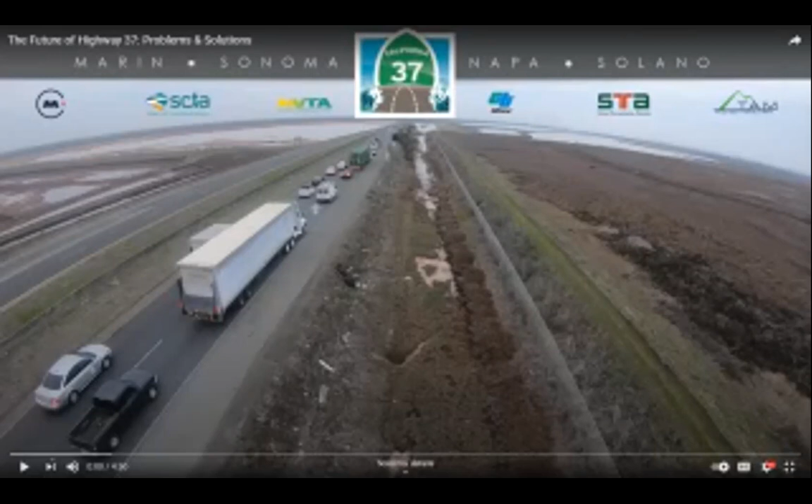Highway 37 is a critical piece of the Bay Area mobility puzzle. The 21-mile corridor connects Solano County cities and some of the most affordable housing in the Bay Area with jobs in Napa, Marin, and Sonoma counties. Yet the route is challenged by issues of congestion, flooding, and sea level rise, as well as limited access for bikes or pedestrians. Even with the pandemic, traffic flow on Highway 37 is routinely pinched by a 10-mile bottleneck. This stretch, in particular from Sears Point to Mare Island, has one lane in each direction separated by a concrete barrier, meaning westbound traffic backs up in the morning, adding up to 30 minutes to the typical commute and impacting Vallejo streets as drivers divert through Mare Island.

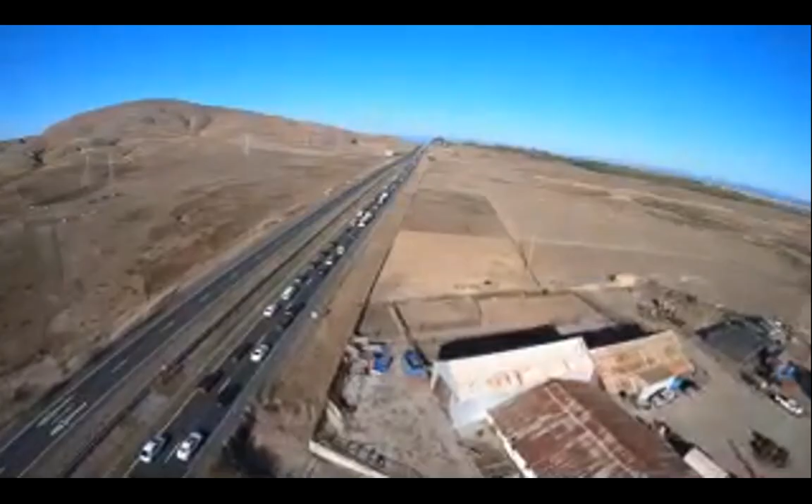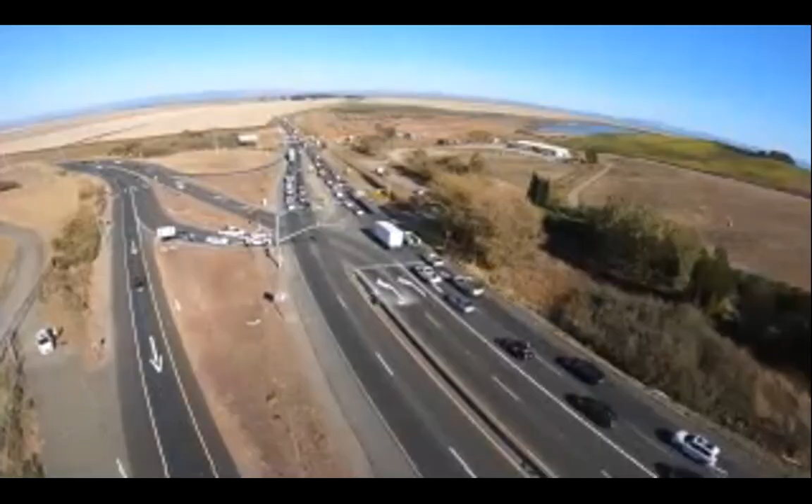In the evening, eastbound traffic backs up from Sears Point to beyond Lakeville Highway, adding as much as an hour and 20 minutes to commute times for some drivers, and extra safety problems for drivers who have diverted onto Lakeville Highway. There is no easy alternative to Highway 37.

As you can see in these two existing options, drivers forced to detour north or south would have to travel twice as far to get from Vallejo to Novato or vice versa.

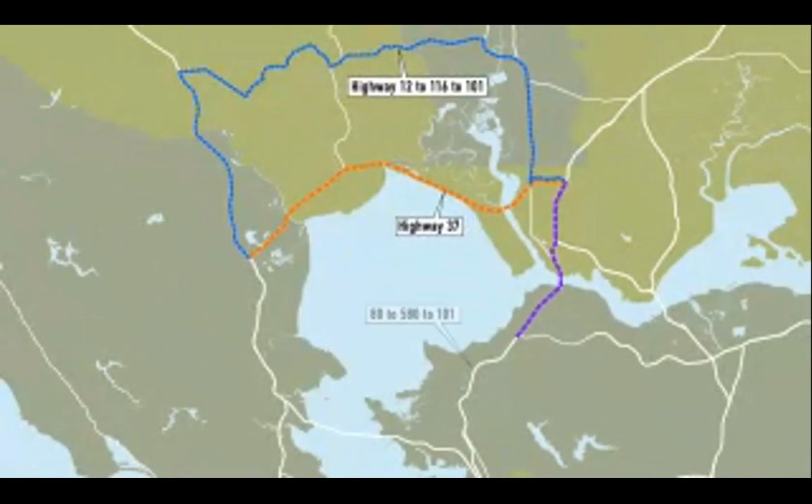A commitment to equity requires a reliable link between the comparatively affordable housing in Solano County and job markets to the west. Highway 37 can be a viable route for future transit service only if buses can avoid congestion.

The situation can be even worse in the winter. Existing levees protect the low-lying highway from everyday flooding, but heavy rains and king tides can shut down the entire highway, as happened for 28 days in 2017 and for 8 days in 2019 due to flooding at the Novato Creek crossing. Rising sea levels will require a permanent long-term solution.

That's why Caltrans, the Metropolitan Transportation Commission, and the transportation authorities in Marin, Sonoma, Napa, and Solano counties have formed a single team to work with you to develop workable ideas and design a modern, resilient Highway 37 that's higher, safer, greener, and built to last.

All options are being considered, including the existing alignment, a new bridge across San Pablo Bay, or an inland retreat.

Is reducing congestion a priority? In addition to providing transportation for cars and trucks, how should Highway 37 accommodate bikes, pedestrians, buses, and maybe even trains? What about conserving wetlands and wildlife, or greater public access to broaden opportunities for all to enjoy the natural resources that flank the highway?

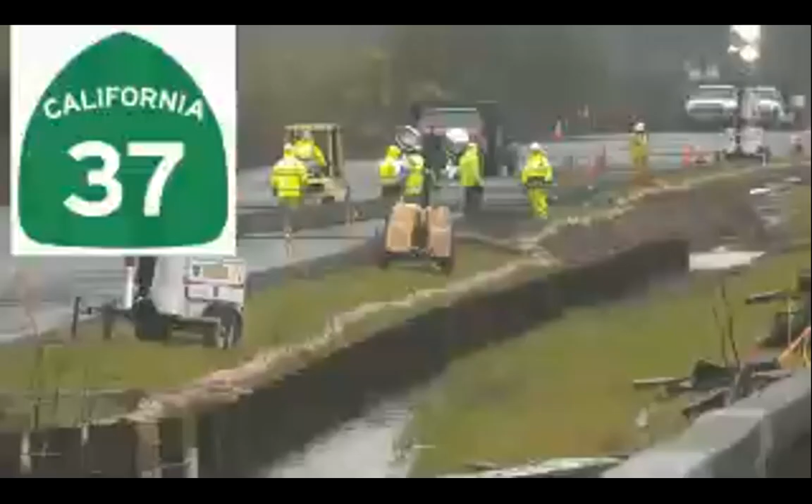On the Marin County end of the corridor, crews already have raised the pavement elevation, built concrete flood walls along critical segments of Novato Creek, installed new drainage systems, culverts, and slide gates, and acquired inflatable rubber bladders and portable pumps for deployment before major storms.

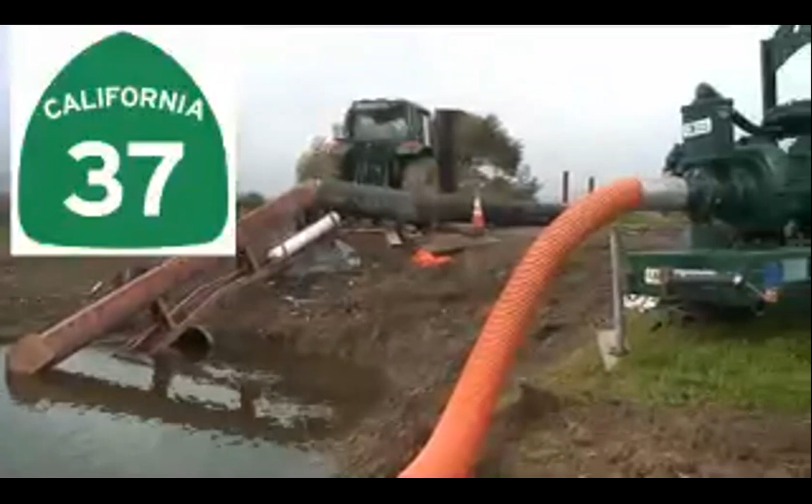Work set to begin soon includes more paving and repair work, mowing and weed abatement.

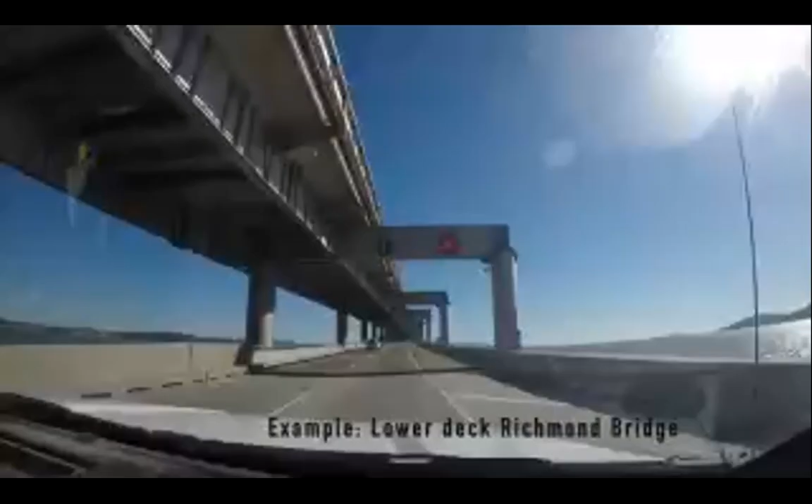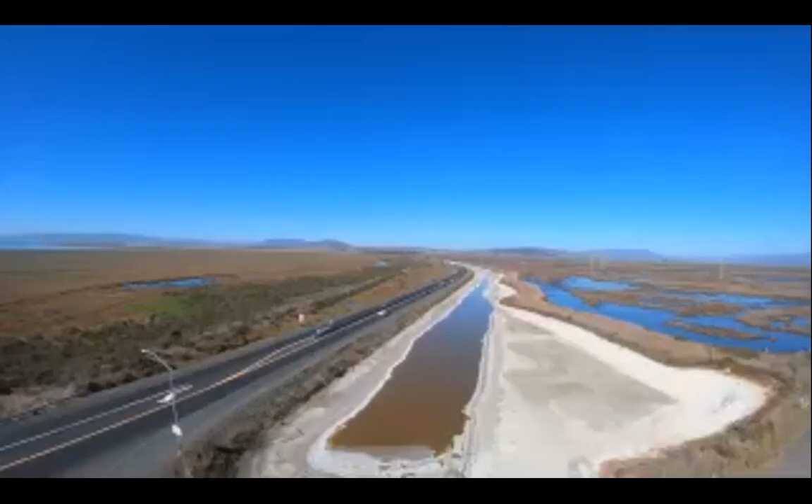Challenges include avoiding impacts on sensitive wetlands and minimizing the use of any bay fill. The other big issue, of course, is money. For both the interim congestion relief alternatives and a long-term project to completely transform Highway 37, tolls may be a practical solution that can serve as a match to secure other regional, state, and federal dollars.

What do you think are the right solutions for the Highway 37 puzzle? We look forward to hearing from you as we discuss the past, the present, and especially the future of Highway 37. One corridor, one team, many solutions. We're glad you are part of the team, and we welcome your ideas for solutions along Highway 37 and in the San Pablo Baylands.

Good evening. My name is Stefan Galvez Abadia. I'm the District Division Chief for the Environmental Division in Caltrans District 4.

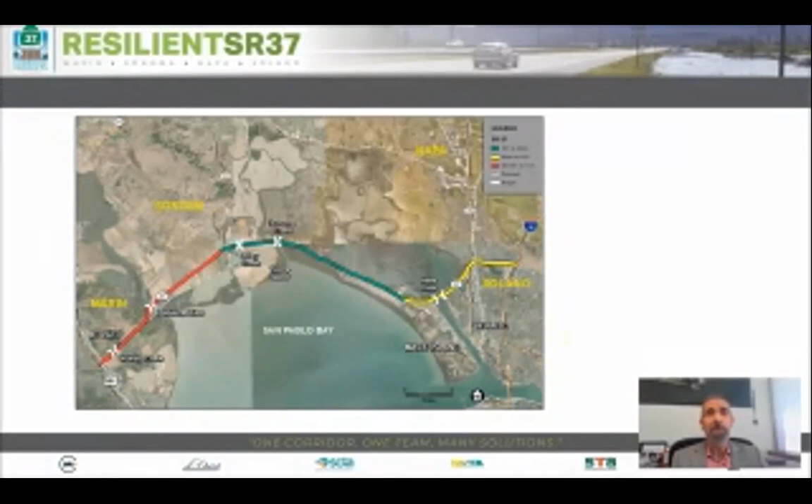As you saw in the video, State Route 37 is a 21-mile long interregional route located along the northern shore of San Pablo Bay with ecologically rich baylands, biological and cultural resources, and is also considered part of the Pacific Flyway for migratory birds. State Route 37 provides a direct link for commuters, freight, and recreational traffic between US 101 to the west and I-80 to the east.

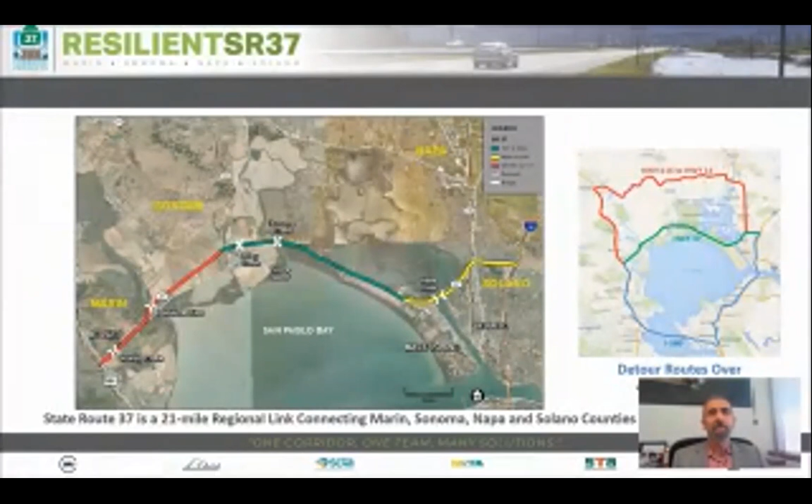Without this key transportation link in place, traffic detours are over 40 miles long. So we think of Route 37 as having three distinct portions.

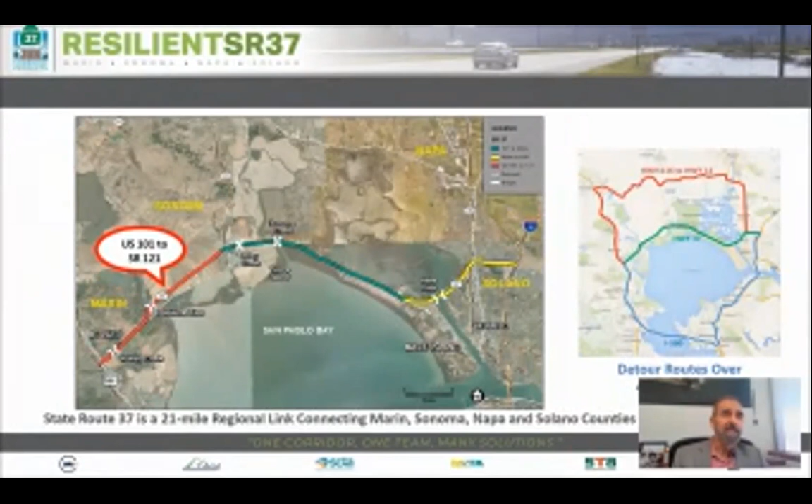So to address these long-term challenges, Caltrans, MTC, and the 4 North Bay counties are collaborating to develop a site-specific and corridor-wide solution. We need your input for these studies.

In addition, a previous design alternatives assessment study looked into options of how to balance congestion and sensitive environment in the middle portion of the corridor, which is shown.

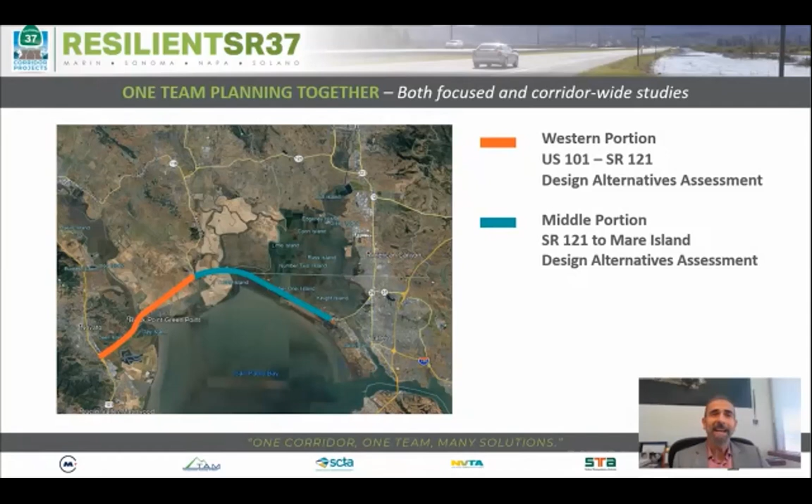Each of these studies and planning processes will benefit from obtaining public input. While this is not the only time we will seek your input, this stage is important because it's going to help us shape the PEL study's draft project purpose and need and the range of solutions. And now I'd like to turn it over to Tammy Massengale, who will tell us more about the PEL study and your involvement in the PEL process.

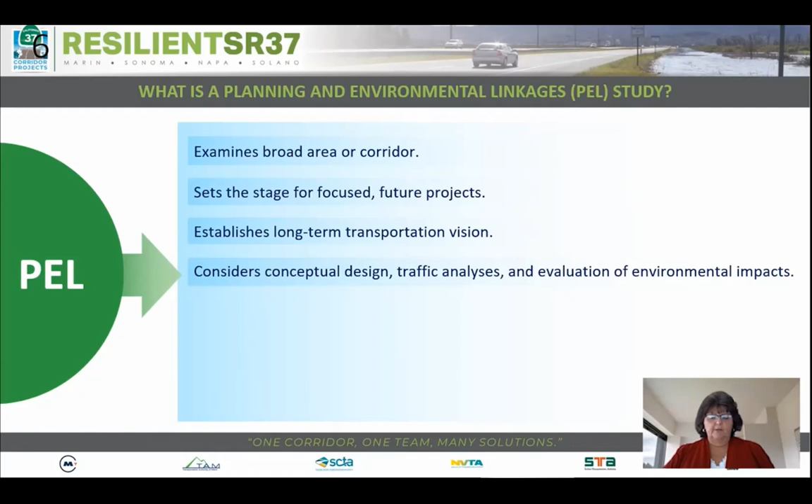The PEL process is a voluntary, flexible, and collaborative planning process. It examines broad transportation, environmental, community, and economic goals early in the planning process. PEL studies allow agencies to look at the big picture by examining a broad area or corridor. PELs establish long-term transportation visions and set the stage for focused future projects. They compile preliminary data and consider a conceptual level of design, traffic analysis, and an evaluation of environmental impacts. PEL also solicits input and, if possible, support from the public, tribes, elected officials, resource agencies, and other stakeholders regarding agency transportation decisions. It establishes buy-in from agencies and stakeholders on corridor vision, purpose and need, alternatives, and consideration of key environmental issues. The process encourages working relationships and early agency involvement, which enables more effective decision-making.

Now, let's look at some of the benefits of a PEL. Some of the key benefits are realized from examining environmental and community values early in transportation project planning. This includes involving agencies and others to find both concerns as well as opportunities for collaboration. It also allows more participation in helping shape transportation solutions.

One of the direct outcomes of a PEL study is that the enhanced and early coordination with resource agencies and the public yields better transportation programs and projects that serve communities' transportation needs more effectively. The PEL supporting studies provide agencies with tools to design better projects while avoiding and minimizing impacts on communities and natural resources. Improved interagency relationships will also help to resolve differences on key issues, moving from planning through design and ultimately project implementation. Another benefit of a PEL study is improved project delivery timeframes by minimizing potential duplication in environmental compliance processes, thus creating one cohesive flow of information.

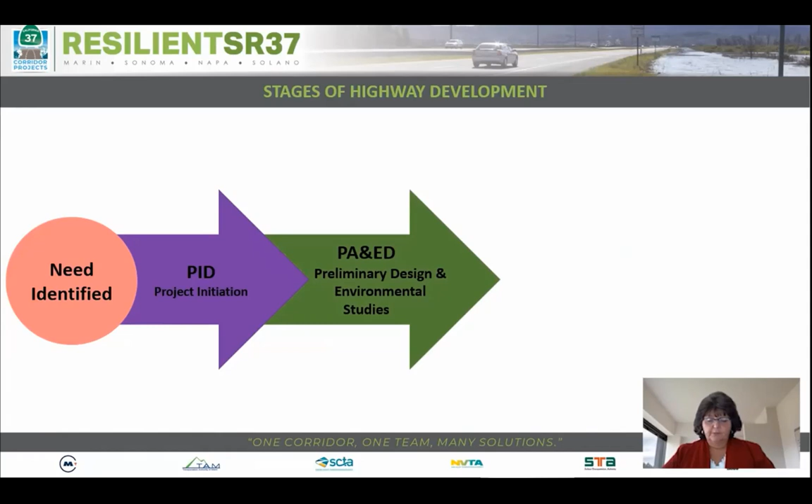Project Approval and Environmental Document, also known as PA&ED, is when the purpose, need, and alternatives are refined. Design is completing preliminary design, and the environmental practitioners are completing technical studies. The final products include the environmental approval and the project report.

At the end of PA&ED, two phases begin. Right-of-way, where agents are working with property owners to obtain rights of entry and purchase of right-of-way, and then at the end of the phase, the surveyors complete monumentation for the project. The other phase is Plans, Specifications, and Estimates, also known as PS&E. During PS&E, the designers are finalizing the design, writing the specifications, and completing the construction costs for the project. Concurrently, the environmental staff is working with resource agencies to obtain permits and, if necessary, complete mitigation.

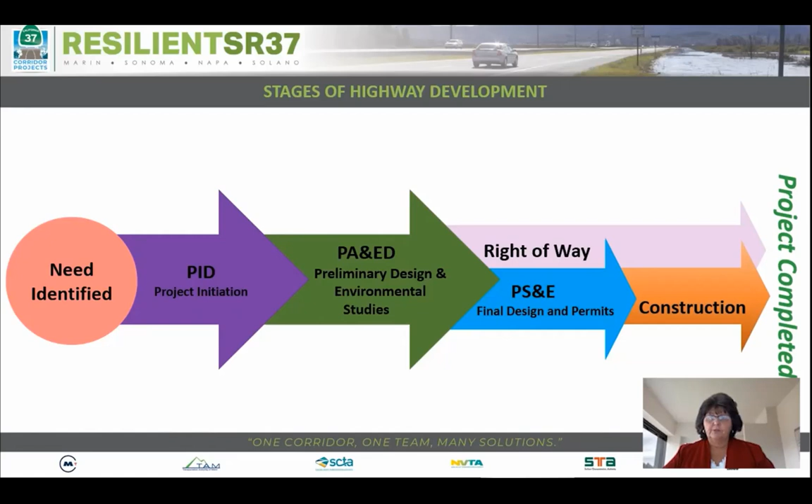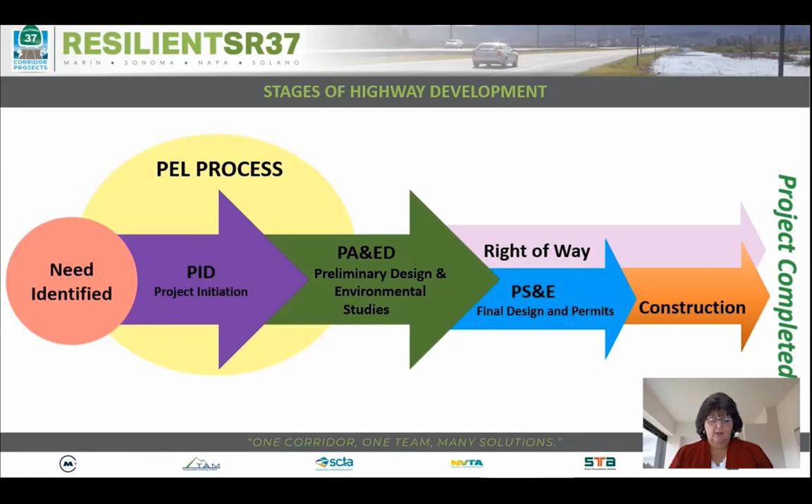The last phase is construction. This is when the project is built and opened to the traveling public. The planning and environmental linkages process takes a lot of work that is typically segmented and brings it together. The detailed purpose and need is developed and a thorough alternatives analysis is completed. These products are moved into the environmental process, saving time to complete the PA&ED phase.

Another challenge is how to integrate transportation planning with the needs and priorities of municipalities and agencies. This integrated planning graphic represents the best practice concept of transportation planning as a layering of the many local components that affect the transportation system.

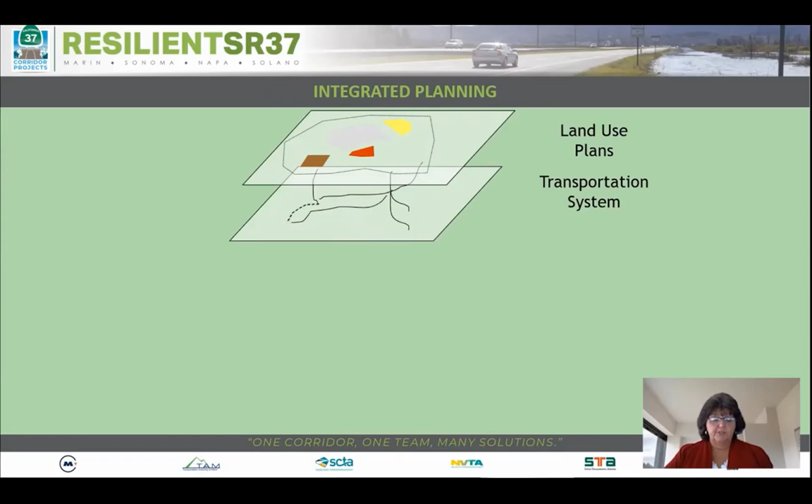While resource data can be integrated at any stage of the transportation process, early integration is best since it's much more difficult to embrace resource agency goals and priorities at later stages. Early coordination helps provide better protection of natural and cultural resources, and maximizes efficient use of scarce staff and financial resources by flagging potential problems before the narrowing of alternatives and completion of detailed design work. Failure to identify inconsistent or incompatible goals among transportation and resource agencies early typically poses a major source of conflict in program and project development.

Throughout the PEL process, we will be using information from previous studies. In the next module, Dick will walk you through how you can access some of this information and provide us with feedback.

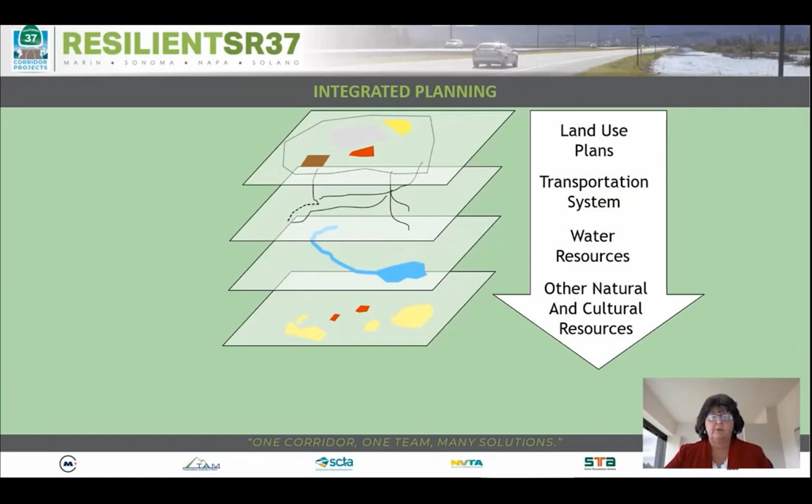In October of 2020, Caltrans District 4 initiated the State Route 37 Ultimate Corridor Planning and Environmental Linkages, or PEL, study from US 101 to I-80, to identify transportation needs, consider alternatives, and develop a comprehensive and collaborative transportation vision for this critical corridor. Since this is the first PEL on the state highway system in California, we spent a couple of months educating our resource agency partners and stakeholders on the PEL process.

As you can see, the last few months have led us to our meeting today. We have conducted meetings with our resource agency partners and stakeholder working group. In those meetings, we identified needs, looked for data gaps, and drafted a purpose statement that we will be discussing in Module 3.

The PEL will look to finalize its purpose and needs statement following our meeting tonight. The PEL will then start working on the alternatives analysis. We are planning a public meeting late this calendar year to discuss this, and we anticipate completing the PEL in the summer of 2022.

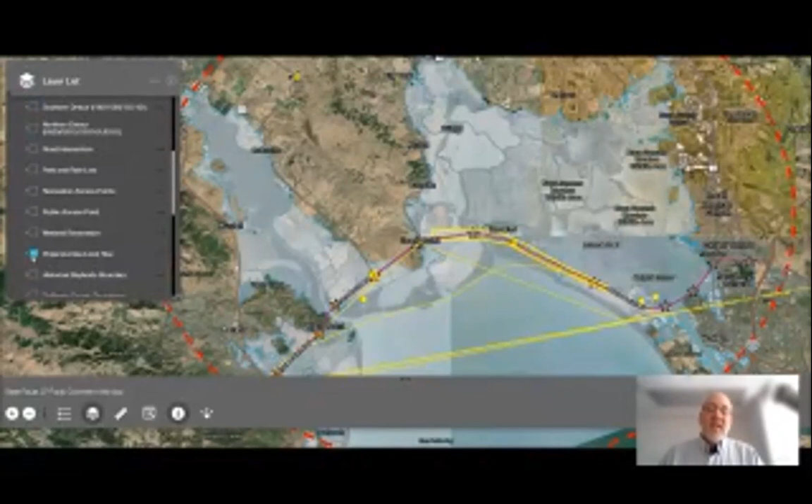Within this web app, you can explore available data for the study area. There's data on sea level rise, land use, bicycle and pedestrian trails, access points, wetland restoration areas, and much more.

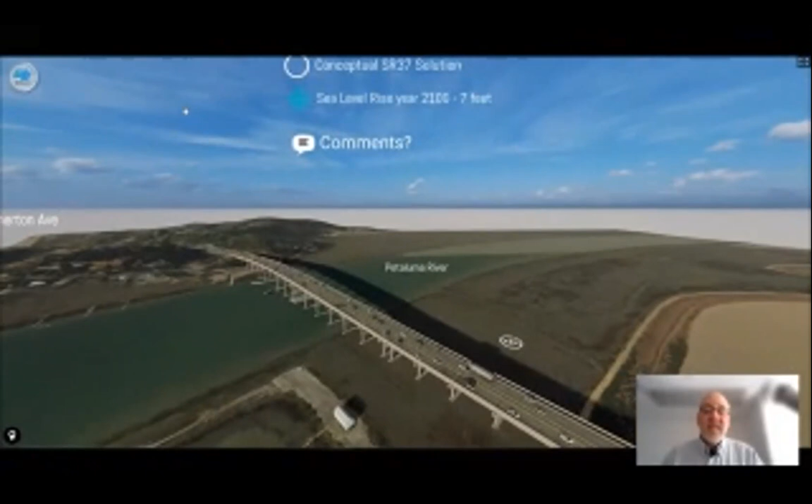There are even links where you can view and interact with 3D renderings. These renderings have been created to assist in visualizing alternatives that have been previously discussed for State Route 37 in past corridor planning and design alternative assessment studies.

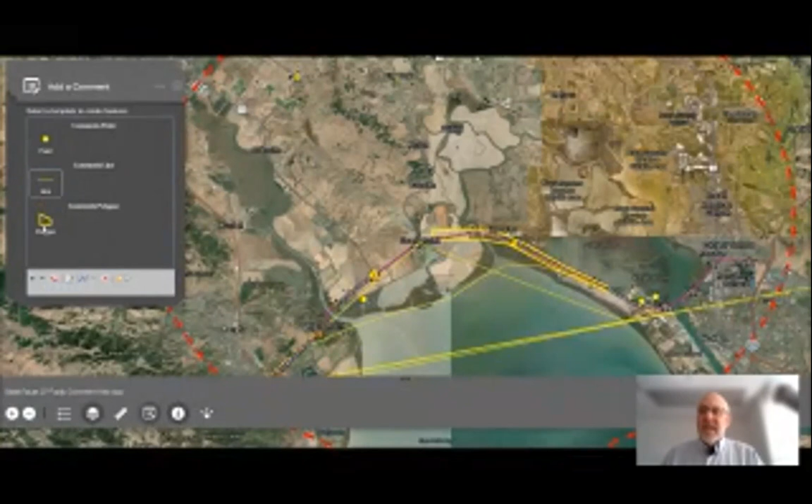Once you familiarize yourself with the platform and explore the data, you can also provide comments directly within the map using the Add a Comment tool that is embedded within this resource. Comments can be added for a point of interest, a line drawing, or an area drawing. We look forward to your engagement in this process.

Climate change and the threats from sea level rise will critically impact the study corridor and surrounding ecosystems. The State Route 37 corridor currently experiences issues with flooding during winter rains and high tide events, and with the ever-increasing threat of sea level rise, the corridor will experience increasing flooding due to the roadway's low-lying elevation and proximity to San Pablo Bay.

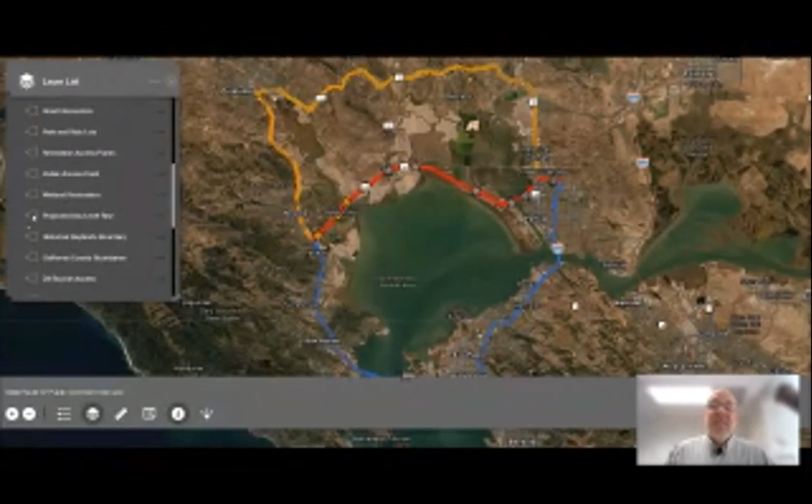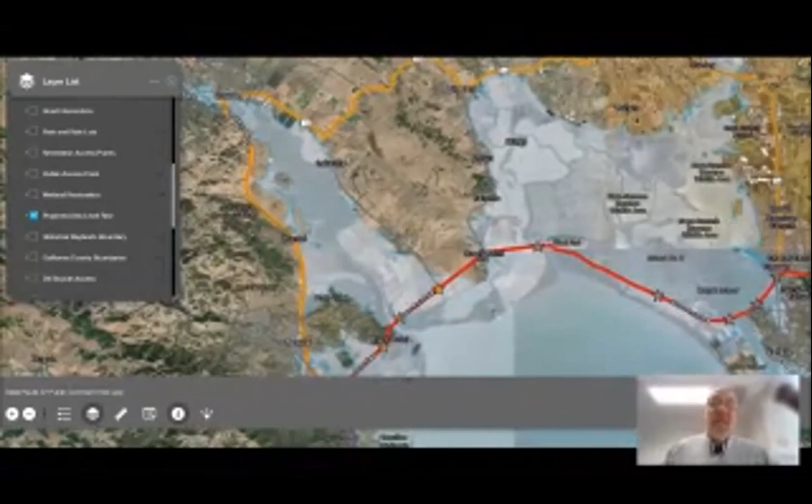The most immediate impact of sea level rise is increased flooding, so that lands that did not previously experience tidal inundation would be newly flooded. In addition, changes in wave height and run-up and increased erosion from wave action at the new shoreline edges will impact shoreline areas as sea levels rise.

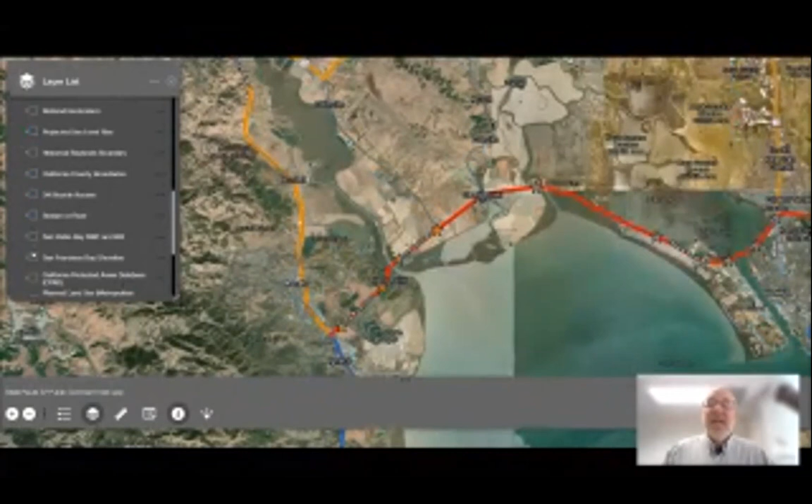Currently, State Route 37 relies on a complex, interconnected system of levees along major creeks and rivers for flood protection. Many of these levees are privately owned and were not constructed specifically for protecting State Route 37 from flooding.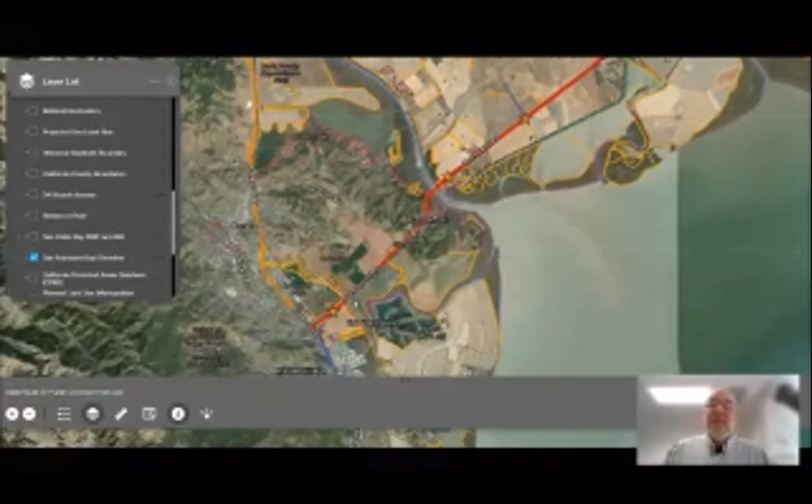Without modifications, current sea level rise projections show that areas of State Route 37 would be permanently inundated with only 36 inches of sea level rise, and could be exposed to storm surge flooding by a 25-year coastal storm event today, or a 5 to 10-year coastal storm event with only 6 to 12 inches of sea level rise.

Here you can see the current elevations of the roadway and rail facilities within the corridor compared to the high-end estimate of 7 feet of sea level rise by the end of the century. The existing infrastructure would not be sustainable in its current configuration if these predicted sea level rise scenarios come to pass. Without taking action now to make bold and forward-leaning planning decisions for these conditions, those that rely on this corridor will be the most impacted.

Good evening, everyone. I'm Lindsay Vivian, and I'm the Office Chief for the Office of Environmental Analysis in Caltrans District 4. We are an office of 30 that conducts environmental review on transportation projects on the state highway system in the 9-county Bay Area. In addition to that, at Caltrans, I'm focused on working with others, including other divisions, to improve the integration of environmental considerations into our project planning and system planning processes. These factors include wildlife connectivity, fish passage, and sea level rise adaptation.

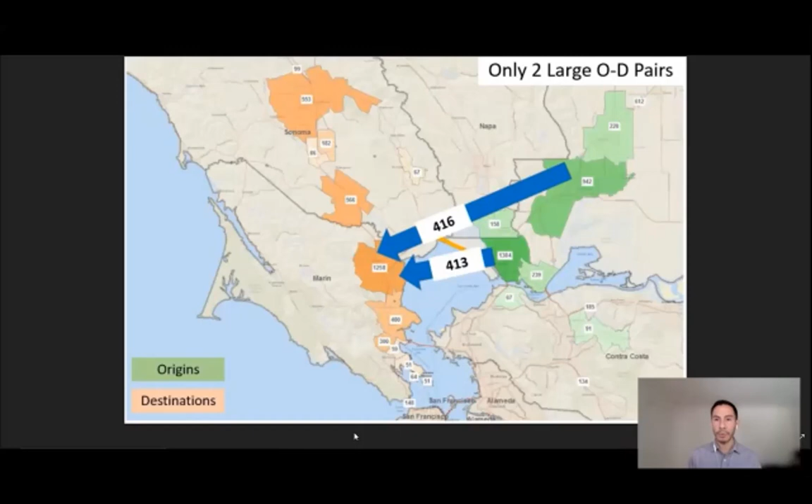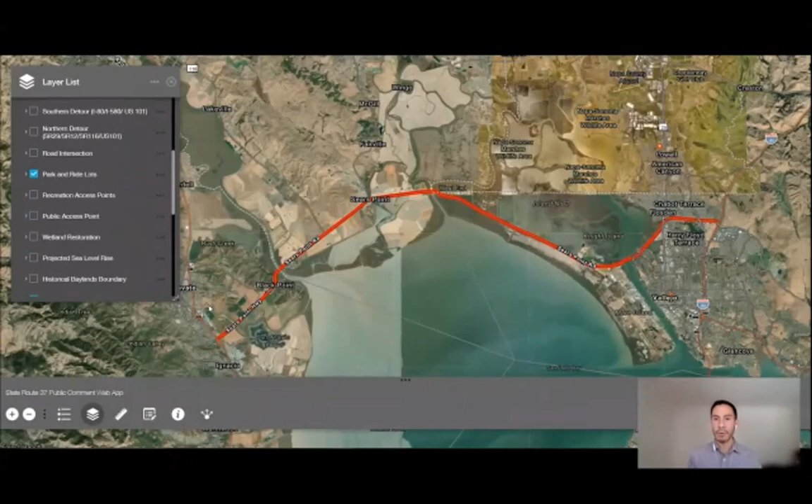Identifying suitable multimodal opportunities and how best to implement them along this corridor is an important consideration during this PEL study. Park and ride opportunities exist along each end of the State Route 37 corridor that could bolster existing carpooling and/or van pooling options. Improvements can include providing additional parking spaces, as well as drop-off locations.

SMART stops may also expand in the future, and the PEL study will consider how the long-term vision for the State Route 37 corridor can integrate carpool and vanpool options with microtransit, express bus connections, or even future passenger rail opportunities if they become viable.

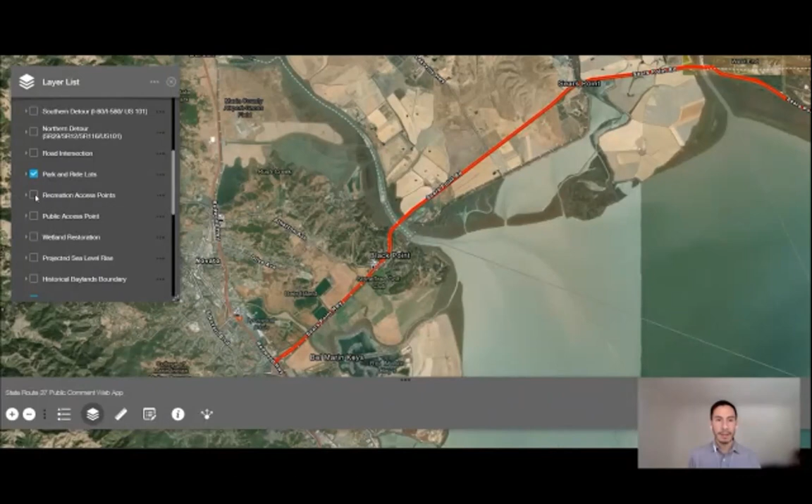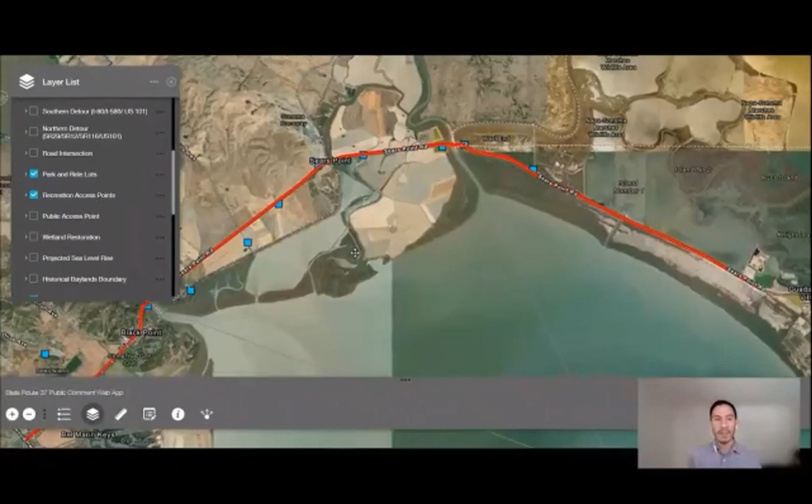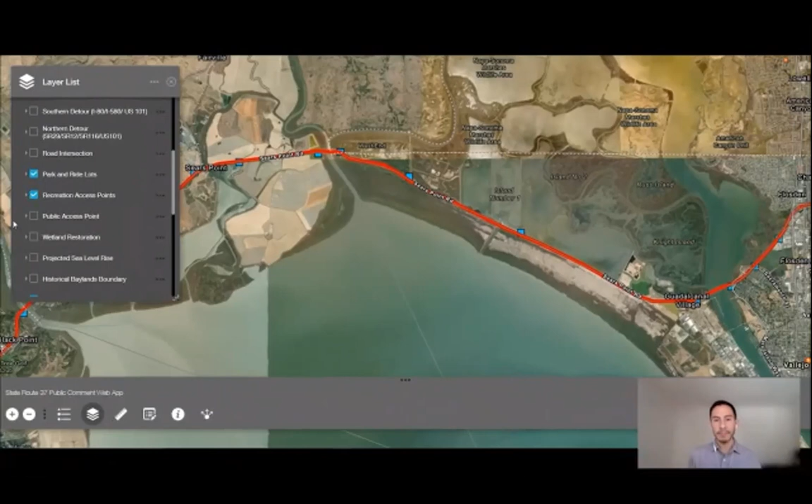The PEL will also consider how best to integrate bicycle and pedestrian facilities along the corridor. These facilities can accommodate both recreational as well as commuting users, especially with increased access to electric bicycles. Here you can see the existing recreational access points currently located along State Route 37. These points allow for the public to pursue recreational and educational opportunities within the North Baylands. You can also see how existing District 4 bicycle access data intersects with existing recreational access points within the study area.

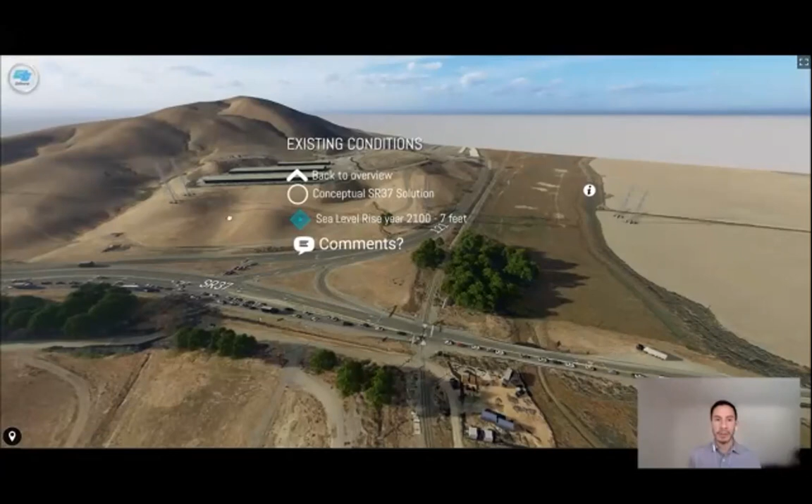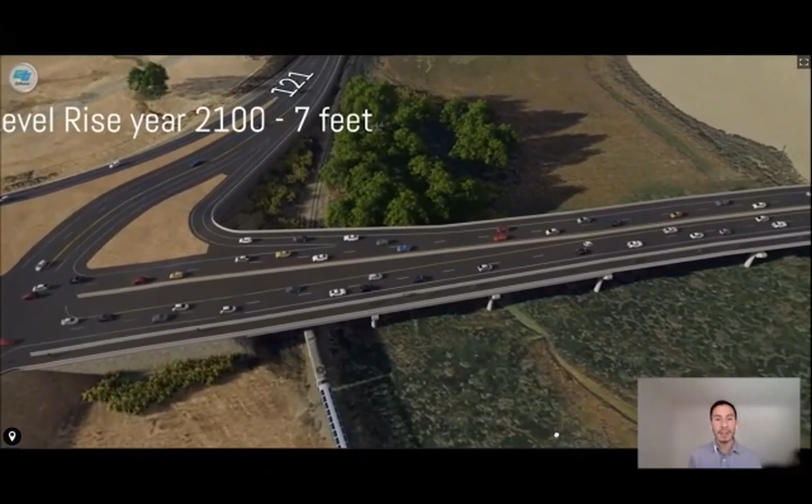With your input, we can evaluate where the right access points are located, what multimodal options are considered, and how best to integrate bicycle and pedestrian facilities into the study. This will allow the long-term vision for the corridor to include a holistic, equitable, and integrated solution for the wide range of corridor users.

Hi, this is Yolanda Rivas, Caltrans Senior Environmental Planner, and I'm here to talk to you about why equity and accessibility are important in the SR 37 corridor planning process. While many variables must be weighed, the ultimate solution will need to address the critical importance of State Route 37 to both the region and the North Bay's transportation. An important component of this system is accessibility and connectivity for disadvantaged communities and communities of concern.

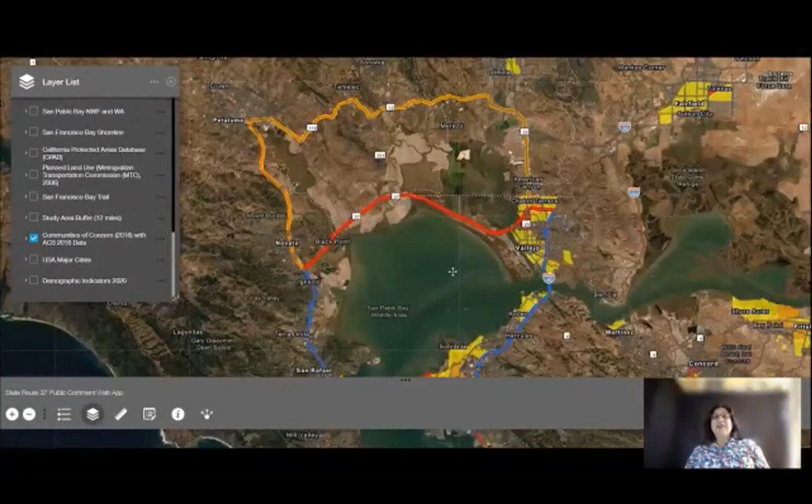By using available community demographic information, such as MTC's Communities of Concern, which shows communities that could be considered disadvantaged or vulnerable now and in the future, we can evaluate how long-term changes to the corridor can best serve the needs of all users, including these populations.

The importance of the 21-mile State Route 37 as a connector between housing and jobs was demonstrated in the multimodal presentation and is of critical importance to the region. Maintaining access and connectivity within this region is imperative to providing equitable transportation solutions for all communities that rely on this corridor. Therefore, access points may need to change or be modified as this corridor is upgraded to meet the challenges of climate change and sea level rise.

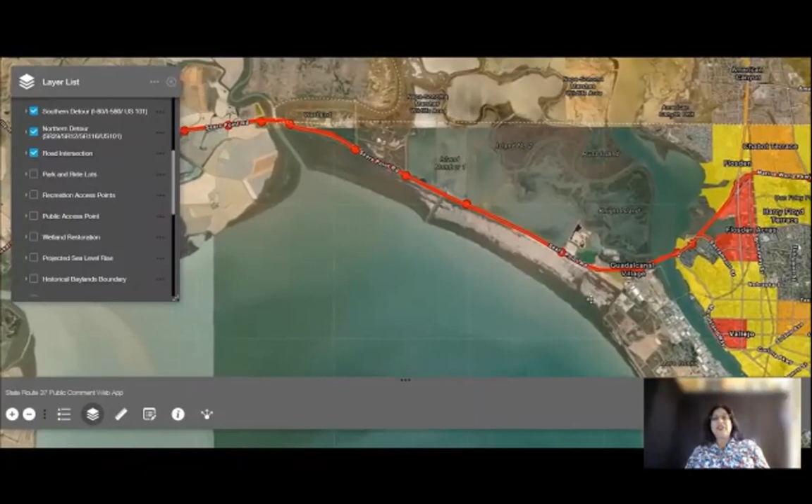Currently, 23 roadway intersections and interchanges exist within the corridor. These access points illustrate how State Route 37 functions as part of the larger regional transportation network in the North Bay. As design alternatives are developed, opportunities to maintain and improve access will be evaluated.

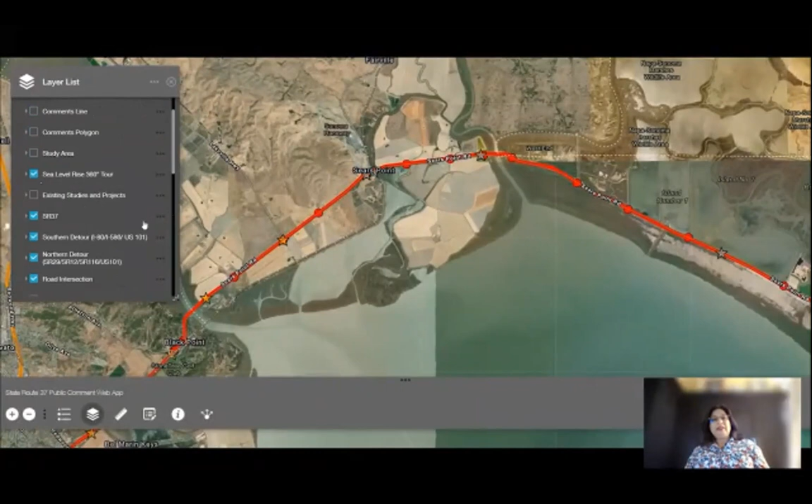Route functionality and movement patterns are tied to travel markets. We will build off prior studies that have identified who is using the corridor, when they are using it, and key origin and destination travel patterns.

Without action, many access points and intersections, such as the Lakeville Highway intersection with State Route 37, will be inundated as sea levels rise, and the users who rely on this critical link would be forced to use alternate routes unless design solutions such as this causeway concept are made a reality.

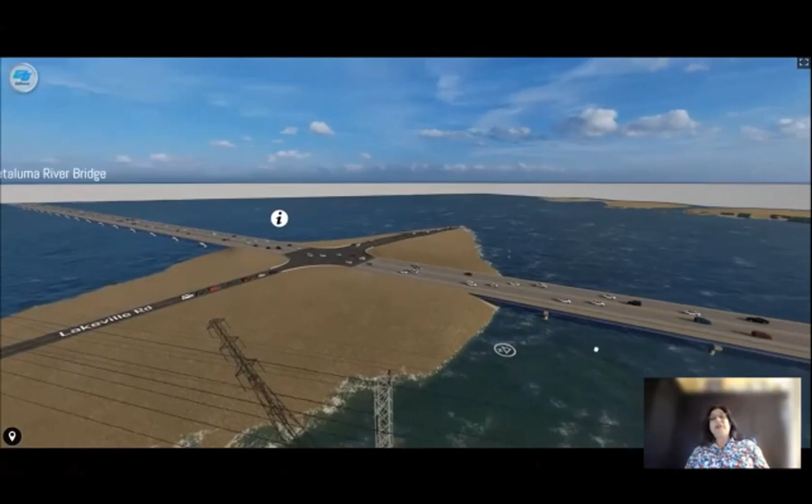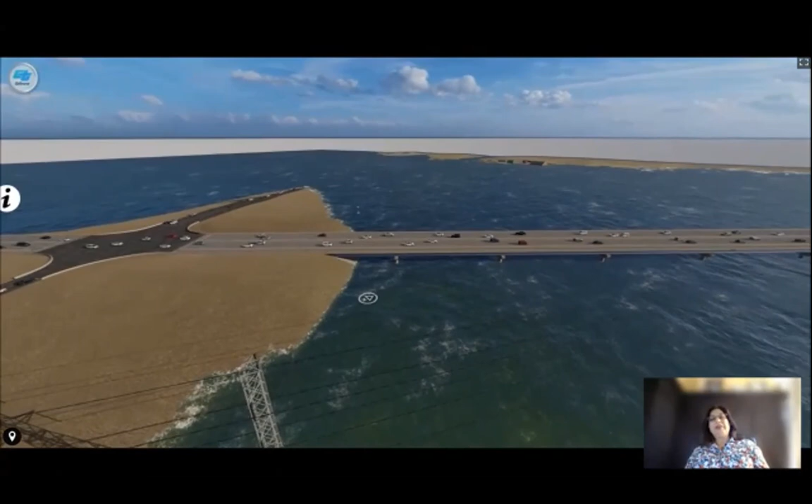By focusing on a large planning area and considering all available data, Caltrans and its partners will develop a long-term vision that addresses the numerous challenges and needs of this corridor.

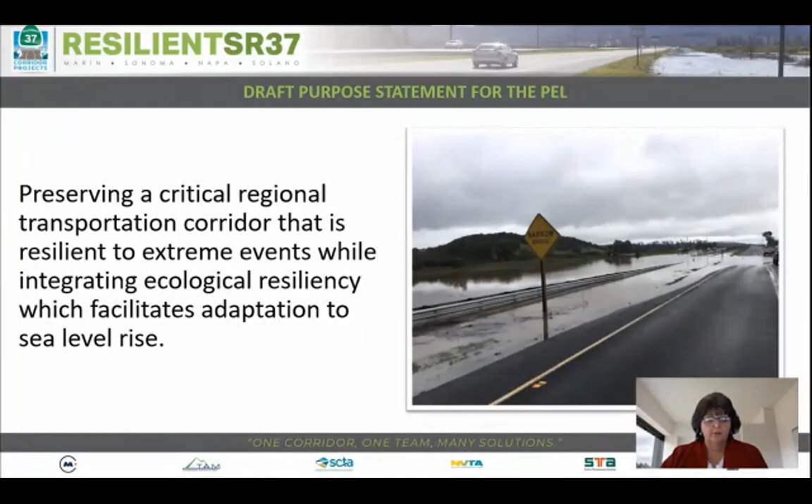The next element is maintaining and enhancing public access, including to recreational areas. For example, the San Pablo Bay National Wildlife Refuge provides numerous recreational opportunities that include wildlife viewing, wildlife photography, hiking, boating, fishing, and hunting. This area allows for public enjoyment of the refuge while still protecting the wildlife and habitats.

The last element is providing an equitable transportation solution that improves access for and provides meaningful benefits to underserved communities. In December 2020, Caltrans adopted an equity statement that recognizes our leadership role and unique responsibility in state government to eliminate barriers to provide more equitable transportation for all Californians. We are reaching out to all communities to listen to and incorporate their needs on our projects.

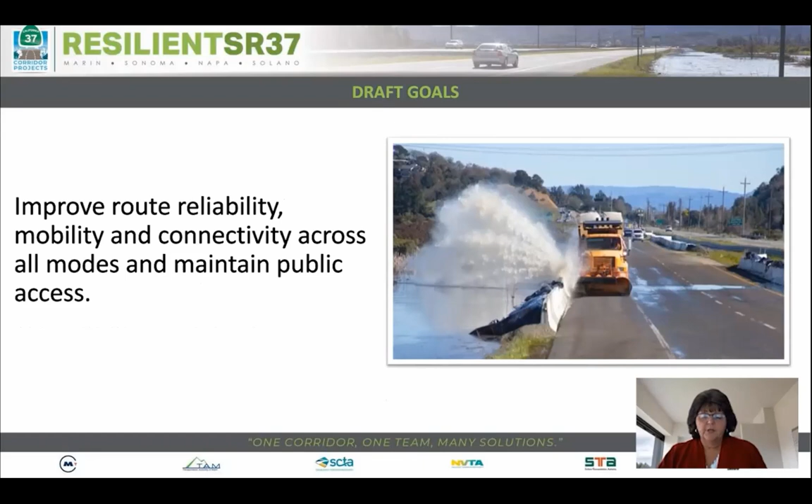Another goal is to improve route reliability, mobility, and connectivity across all modes and maintain public access for corridor commuters, residents, and essential services and industries in the area.

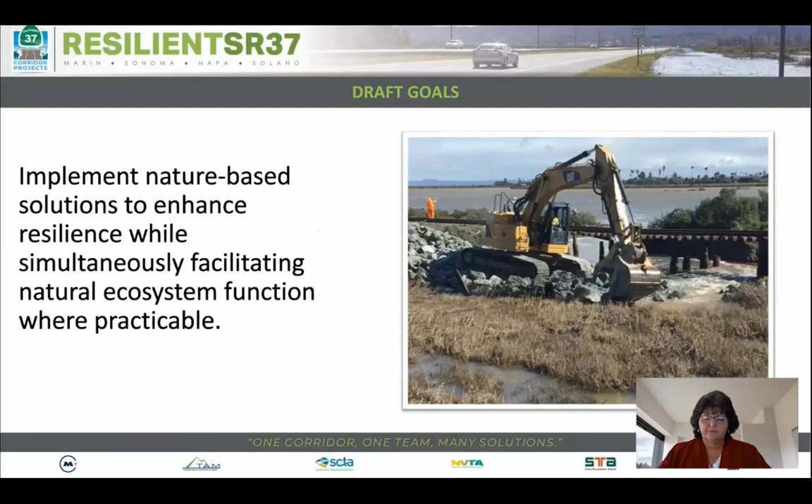Another goal is to implement, to the extent practicable, nature-based solutions to enhance resilience in the coastal environment to flooding, wave action, and erosion, while simultaneously facilitating natural ecosystem function and adaptation to the stresses of climate change.

By planning for future conditions and working through partnership, collaboration, and cooperation with federal, state, and local agencies, we can achieve ancillary benefits such as improved water quality, habitat, and fisheries within the Northern Baylands.

These are the draft goals and objectives we have identified so far. Are there other needs or goals you want to see included in the PEL study?

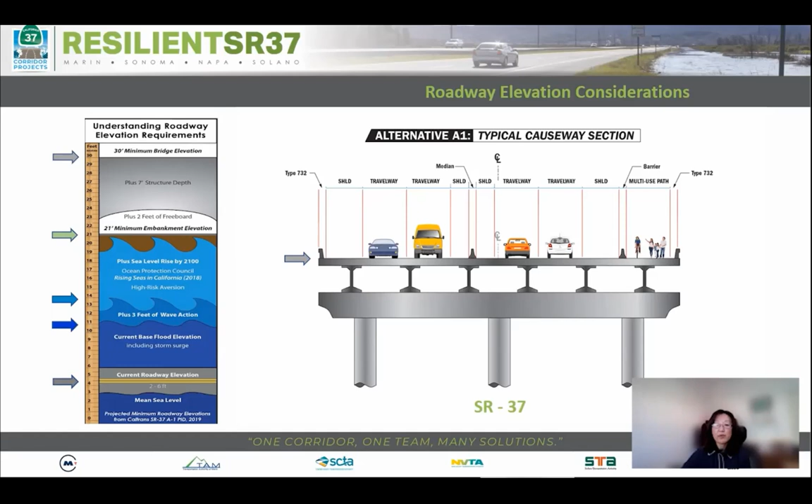Three primary strategies exist for adapting infrastructure such as State Route 37 to sea level rise. The protect strategy entails building hard barriers such as seawalls or soft barriers like nature-based levees and reefs to stop or buffer the encroaching water and protect assets from flooding. The accommodate strategy involves modifying assets such as a highway so that they can accommodate regular or periodic flooding. And lastly, the relocate or retreat strategy involves relocating assets from a potential flood zone inland.

Each of these strategies comes with a trade-off, as shown on the following slides, and not all strategies will work in every situation. For example, relocating existing properties could be disruptive, expensive, and not always logistically possible. Armoring too much of the coast, however, is also not practical. Therefore, selecting which combination of sea level rise adaptation strategies to use in a particular location is an involved process, combining scientific research, locally specific information, public and stakeholder input and support, and both high-level and detailed planning. In complex situations such as the State Route 37 corridor, a hybrid approach of these strategies is often employed.

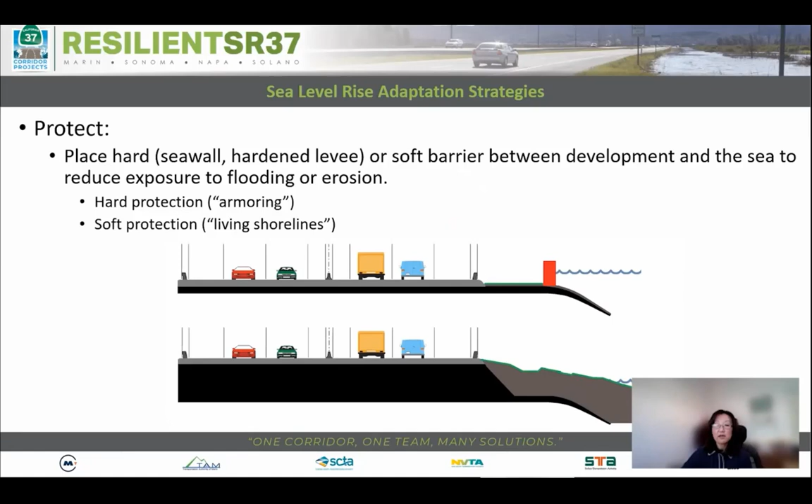The protect strategy has advantages and disadvantages. One advantage is that it can allow existing development and infrastructure to remain in place. It can also be less costly than other strategies. The disadvantage is that hard protection can contribute to beach erosion and increase flooding in adjacent areas. Soft protection will likely become a less viable strategy once sea level rise reaches the higher stages of projection levels.

The next adaptation strategy is accommodate. This approach modifies or replaces infrastructure so that it can withstand sea level rise without damage. The advantage of this approach is that it can allow existing development and infrastructure to remain in place once modified. The disadvantage is that it can be costly and difficult, given existing construction, to modify existing development in place.

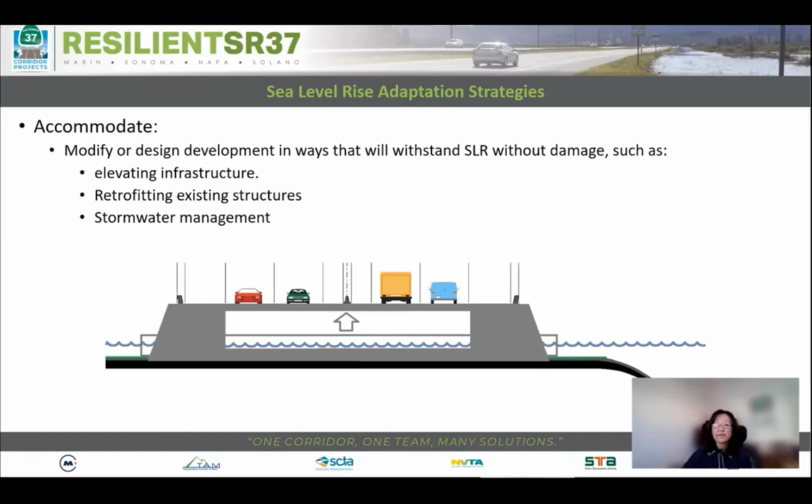Accommodating sea level rise can include the construction of a causeway, as you see here. Accommodation may also include the construction of an elevated roadway on an embankment, as shown here.

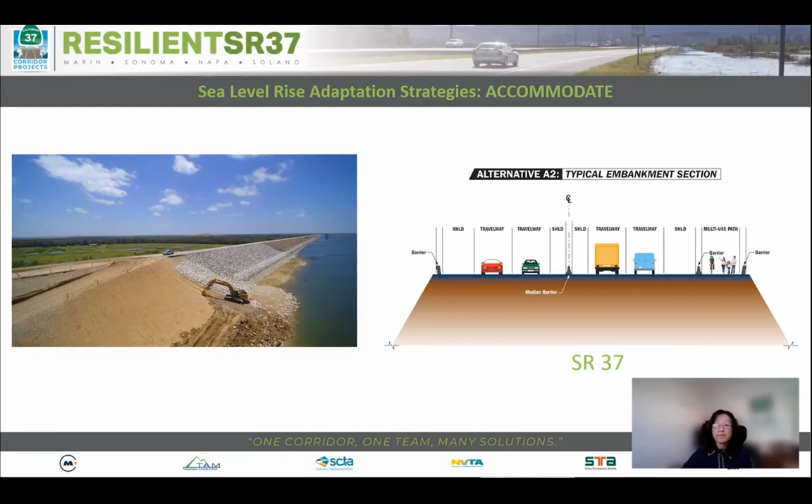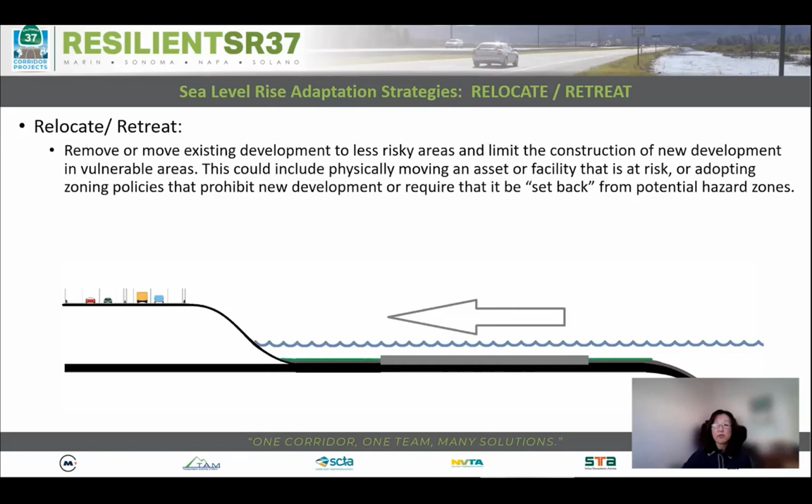The relocate or retreat strategy includes physically moving an asset or facility at risk from sea level rise. The advantage of this strategy is that it can provide space for beaches and wetlands to migrate inland as water rises. This approach can ensure that infrastructure is or will be safe from flooding. However, the disadvantage of this approach is that it can be difficult, costly, or impossible to relocate existing infrastructure, and it potentially removes connections to local streets and roads.

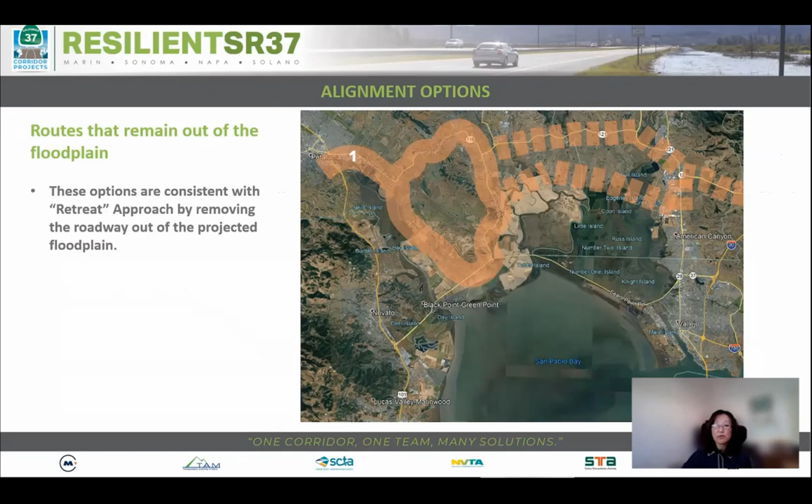The PEL study will incorporate existing and past studies to determine viable protect, accommodate, and retreat or relocate strategies. Here you can see an alignment that remains out of the floodplain of the Bayland marshes. These options consistent with a retreat approach by removing the roadway out of the projected floodplain.

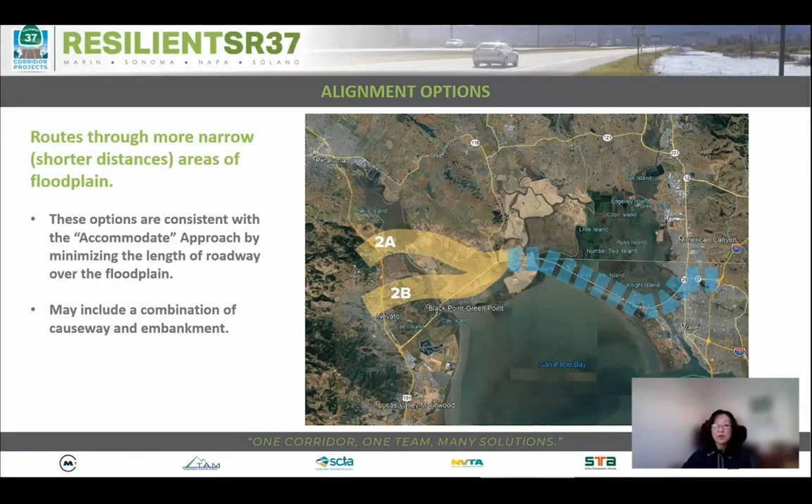Here you can see shorter route options. These options are consistent with the accommodate approach by minimizing the length of roadway over the floodplain, and may include a combination of causeway and embankment.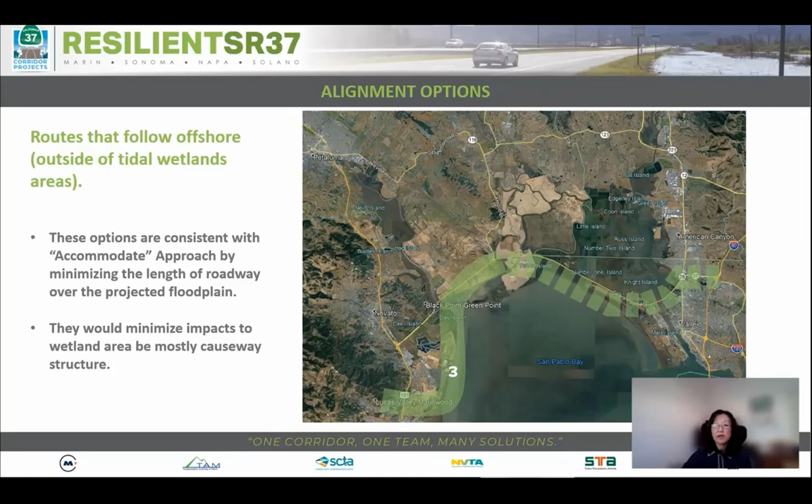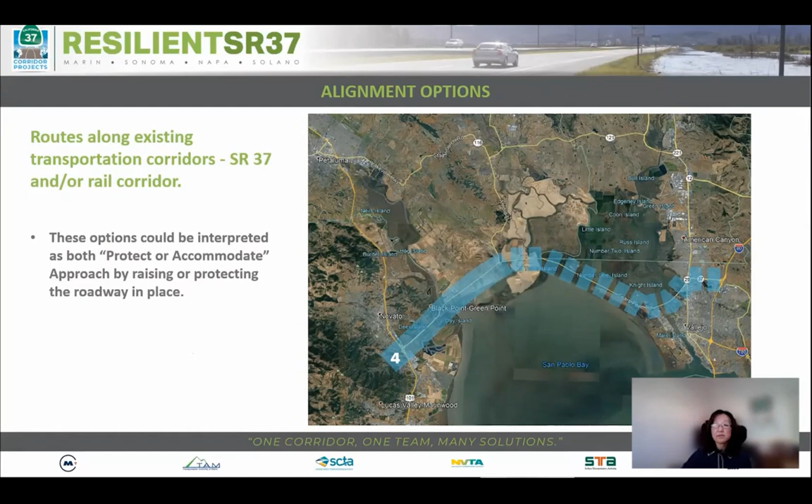Here are some alignment options that follow or utilize existing transportation corridors such as State Route 37 and/or the rail corridor. These options could be interpreted as both protect and accommodate because they are raising or protecting State Route 37 in place. This alignment option relocates State Route 37 onto a causeway over San Pablo Bay. It is one of those options that employs both relocate and accommodate strategies.

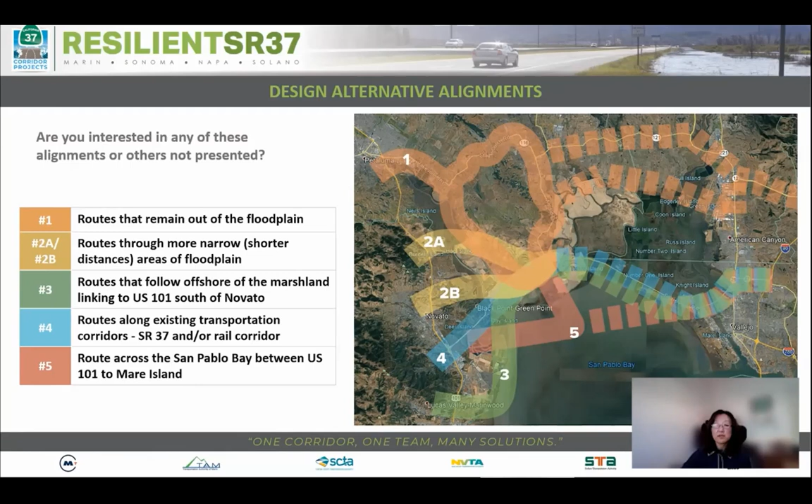Our question for this evening: are we missing any alignments or design considerations besides the embankment and causeway? You may share your thoughts or suggestions for alignments tonight through the chat discussion or following this meeting, using the many means and tools we've discussed to provide your feedback.

In addition to sea level rise, when we develop alternatives we must consider how our proposed solution affects our communities, our environment, and of course how a change in alignment may affect the use of 37. There are many considerations here. What considerations are important to you? We'd like to hear from you and get your input.

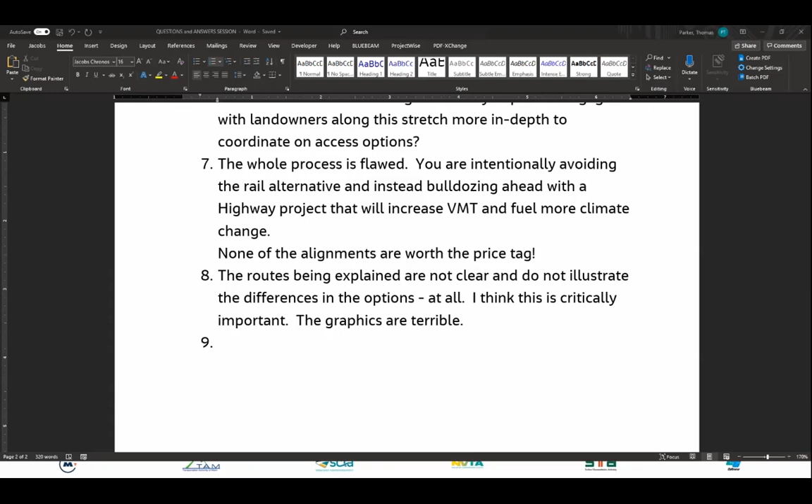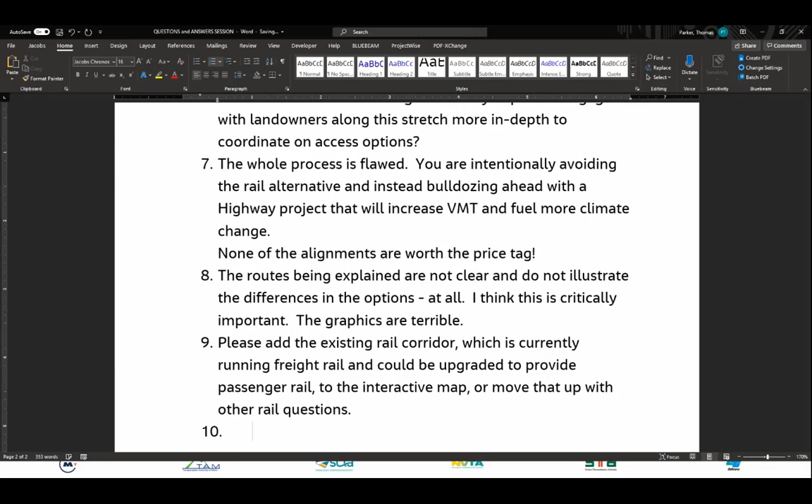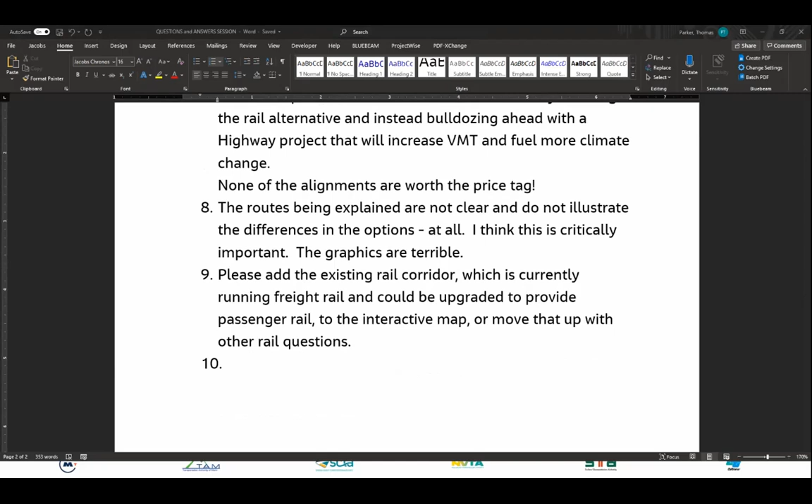Will there be options to improve Bay Trail access during the interim portion of this project? Stefan, is this something that you can also address?

Yeah, I could take a first step. We always add enhancements, improvements to the system, and we're looking at a multimodal system here that addresses the needs for all members of society, for all modes of transportation. So the Bay Trail is an important component of that system. So that will be considered.

There have been some sort of interim work trying to identify the different Bay Trail segments and some areas that could become an opportunity. So we'll continue to explore this. So the short answer is yes, we're going to be looking into it. Not sure if Kevin, you may want to add anything else, or James.

And again, Stefan, is this something that someone can go to the interactive tool and where they think some of these improvements can be made? Absolutely. We want to give you the tools to go ahead, and if there's specific locations that you want to highlight and you want us to pay more close attention to it, feel free to use those tools.

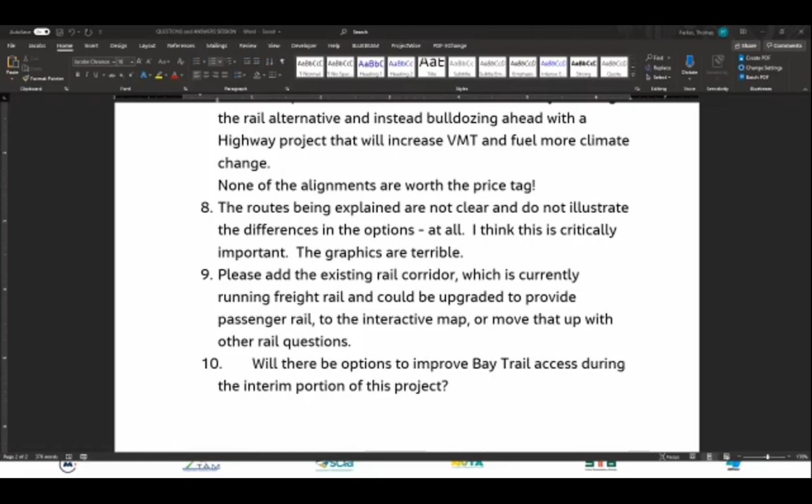The next question here: I live in American Canyon and I'm very concerned about extra traffic on State Route 29, very congested and spilling onto local residential streets. How will you support us? Stefan, Sanjay, is this a question you'd like to get us started on?

Yes, I'll take the first cut at it. So yeah, definitely traffic bypassing Route 37 onto other areas, over other residential streets is a concern for all of us. We're trying to identify what may be those potential effects as a result of our activities. So that is something that we will be looking into.

I don't have any specifics at this moment about that, other than it's something that we're considering and we'll be looking into it. Sanjay, you'd like to comment?

Yes, I would like to say that we understand that there are some spillovers from the Highway 37 traffic to 29. Some of the projects that we are working on are going to relieve some of the congestion we have on 29 - the Soscol Junction project. We're actually also going through some of the PID effort for the SR 29 corridor with the City of American Canyon. But eventually when the interim projects take shape on 37, we expect that those improvements will eventually reduce traffic on 29.

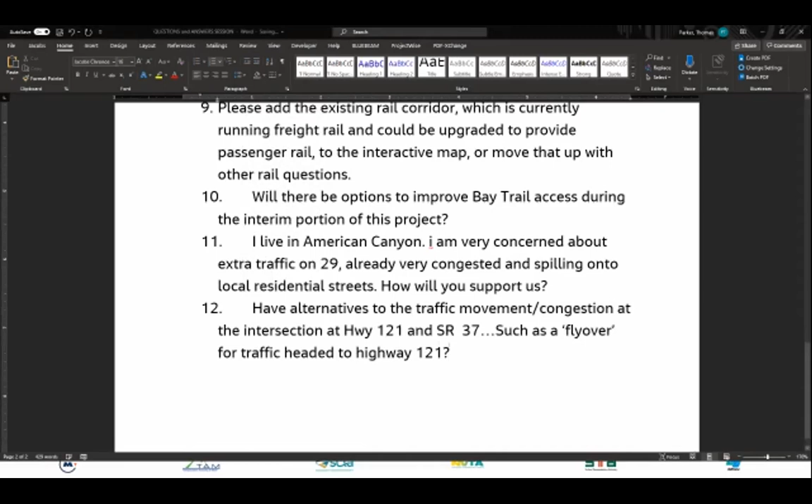Have alternatives to the traffic movement congestion at the intersection at Highway 121 and SR 37, such as a flyover for traffic, been considered? Kelly, is this something that you can get our discussion started about what are some of these alternatives that may be considered?

Sure. So for the junction at State Route 121 and 37, what we are looking at as the interim solution is to immediately address the congestion relief pretty much at grade. I think one of the visual simulations we've seen earlier tonight does have a grade separation with a smart railroad at grade and the State Route 37 being elevated. So certainly the range of alternatives that we study for the ultimate could consider the flyover and other options. Yeah, we'll definitely include that as part of our consideration.

Great, thank you for that response. And by all means, if anyone else on the panel wants to chime in, please jump in. We've got a lot of really good questions here. We've got about 15 minutes left on this meeting.

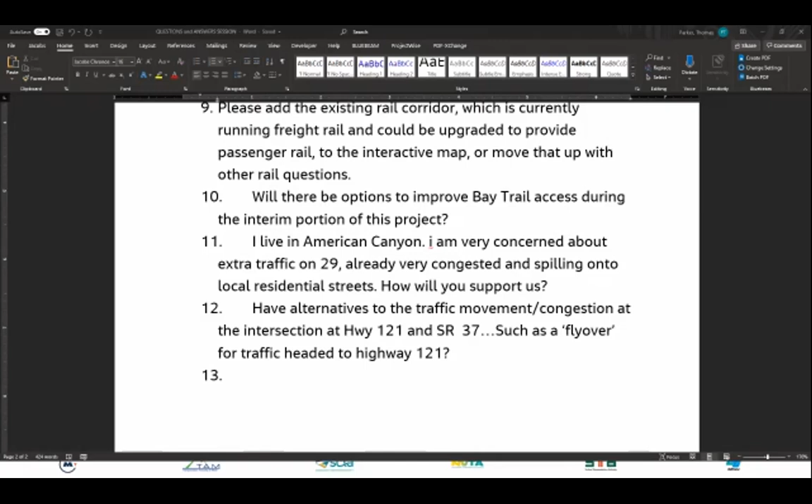As a reminder, if our panel is not able to address questions tonight, your input and these questions will be taken into consideration in the PEL process. So we'll get through as many more of these as we can.

Okay, here is a good question. Is the purpose of the project to protect or continue the corridor, or is the purpose to continue to provide a direct means of conveying travelers and goods across San Pablo Bay? Second part: how much would it cost to raise the roadway 21 feet and each bridge 30 feet? Regardless of the selected alignment, the height requirements won't change. It will not be possible to raise only part of the corridor 21 feet, for example. Third part: what is the design year? Is this going to be built out to the year 2100? If we are using public funds to raise this roadway, are other highly traveled state routes which will be subject to sea level rise, such as 101, 80, and others, also being addressed? State Route 37 is the first to be affected, but how do we have the funds to fix all the routes that will need attention? How are these choices being factored into the PEL development? Really, five parts of this question.

If we can start from the beginning and address the comment about need - Tammy, if you could please get us started. Yeah, most certainly.

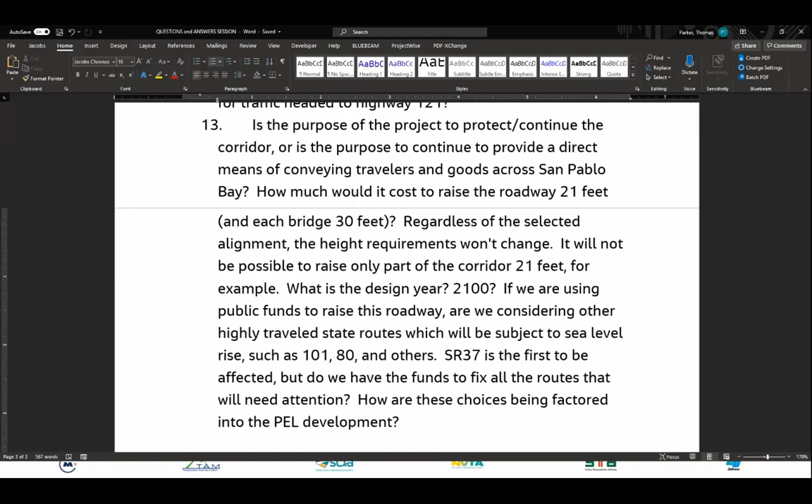First is finding out what the threats are going to be, and for that Caltrans has conducted the vulnerability assessment. But as Dick mentioned, we have a whole network of infrastructure that surrounds the bay. Lots of it is going to be threatened in the next few years, and some of it is being threatened right now. This is all part of it - for Route 37, we're going to be looking at that. For other routes, it's something we're going to have to tackle.

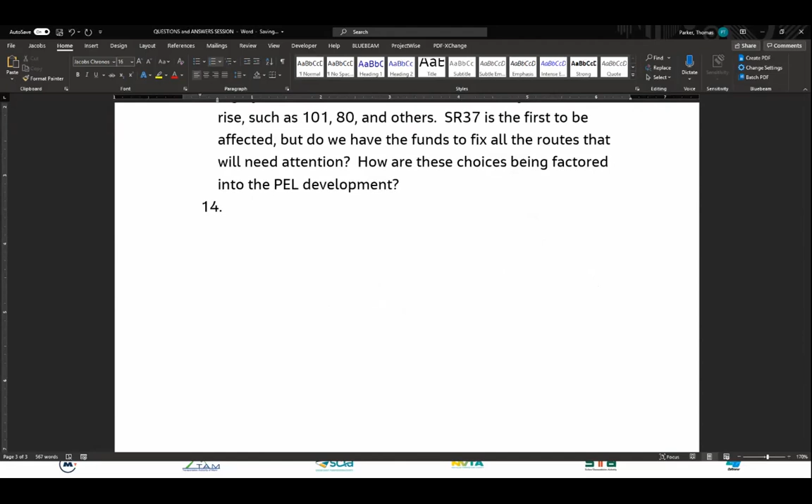Next question: would it be possible to run a ferry route from Vallejo that is closer to San Rafael, north of Sausalito, the Tiburon Ferry? Great question. Stefan, if you don't mind me putting you on the spot, is this something you'd like to get us started on, and perhaps one of our partners might provide some further input?

Yeah, so I believe the issue of ferries is something that has been explored to some extent. We want potential options, but I don't have any specific answers for that. It's something we could look at in more detail, but I believe MTC has done some work on that. So can I pass it on to you, Ashley, or Kevin? I think Janet Adams could answer this question.

Yes, Devin, I just want to say a couple words. It is possible, certainly, from Vallejo to San Rafael, we do have existing facilities at both those locations. We did do a study looking at just that, because we thought it was an obvious question, why don't we run a ferry? The issue is ridership. So while it's possible to run it, the ridership would be very low because there's not focused job centers in Marin. What we found is the commuters are really dispersed across the 37 corridor. So it is possible, it's just not high ridership.

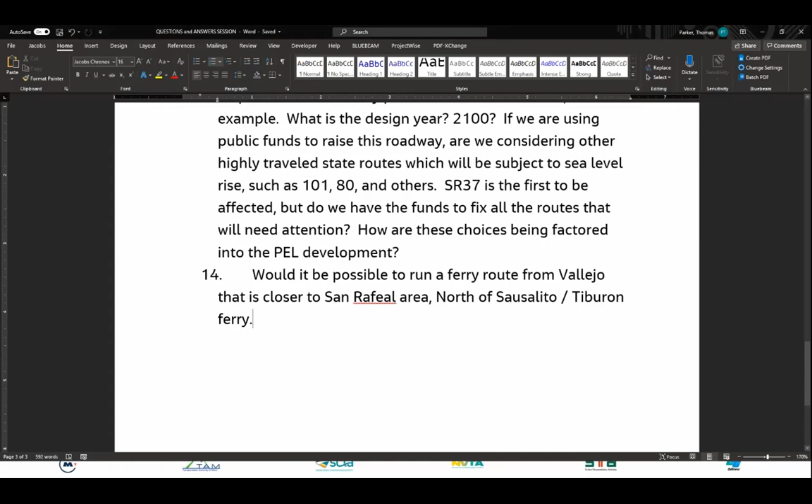Great, thank you for that answer, Janet. All right, over to our last question here before turning it over for closing remarks. Since the PEL is focused on the long-term vision, which presumably should be something like moving people and goods reliably around the North Bay area for the next 100 years, in a manner to accommodate changing, uncertain demands and constraints, why is the purpose and need focused only on the existing highway rather than all transportation modes?

Tammy, I think this is a great question for you to get us started on. Yeah, great, thanks Erica. I'm sorry if it seems like the purpose and need is only focused on the highway. We will be considering modes of transportation when we are looking at the PEL. So if you want us to look at something specific, please feel free to put that in via a phone call to our phone number or an email. But we're going to be looking at all modes of transportation, not just the highway.